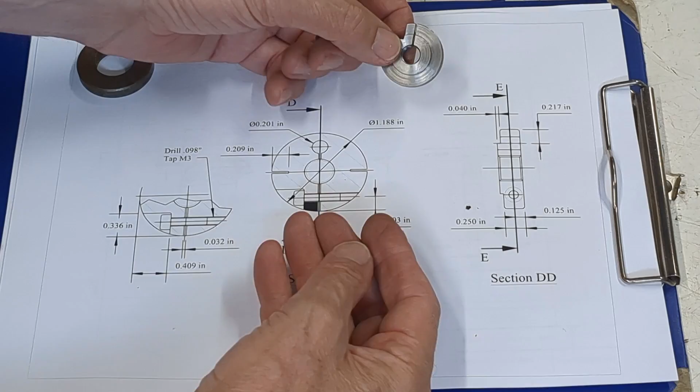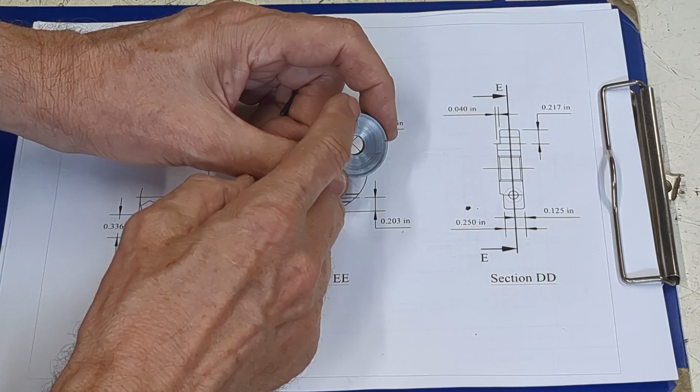I don't know what I was thinking when I drew up the split nut. There's a little tiny 3mm screw that goes in there, and the idea was to clamp that up and tighten on the thread. But there's no way that that is going to bend that section - that's just totally unrealistic. What I should have done is relief this side here and maybe put some additional cuts here as per this modified drawing.

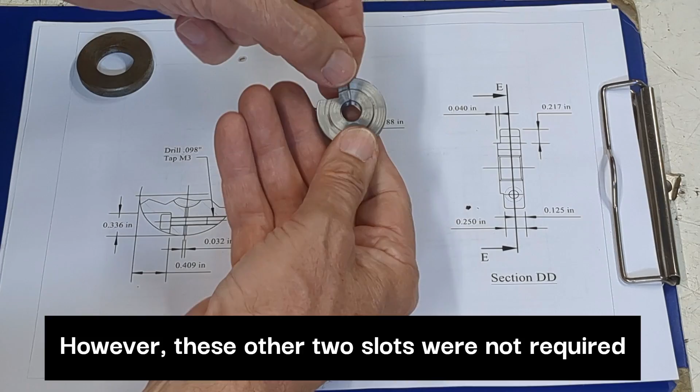So what we need to do is drill in position here this hole, and then continue the slitting saw through into that, and additionally a couple of slots from the outside, and those slots from the outside will just clear the shoulder, so they'll come into sort of that position.

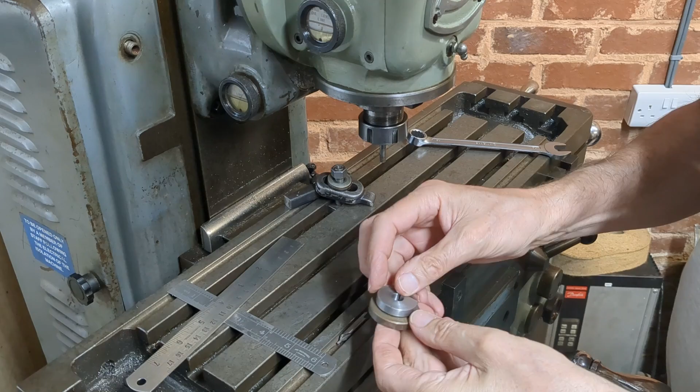So over to the mill to set this up, first of all aligning this with the axis of the machine, picking up on the diameter and drilling that hole. I need to sit the component on this little disc I've got here so I don't go into the table, and also I've got adequate support.

I used a ruler which fitted nicely in the existing slot to align the slot with the axis of the table.

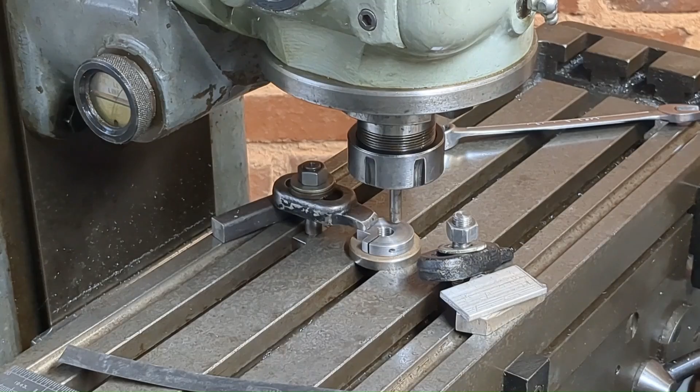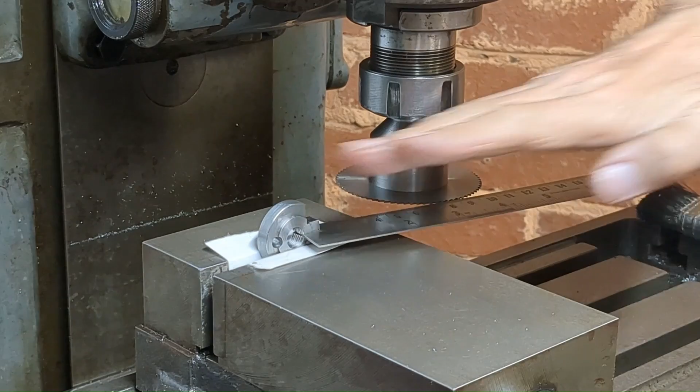Again, the ruler came in handy for lining up the slot with the slitting saw to extend that slot through to the other side.

Let's just see if that's cut all the way through. Oh, it has. Great.

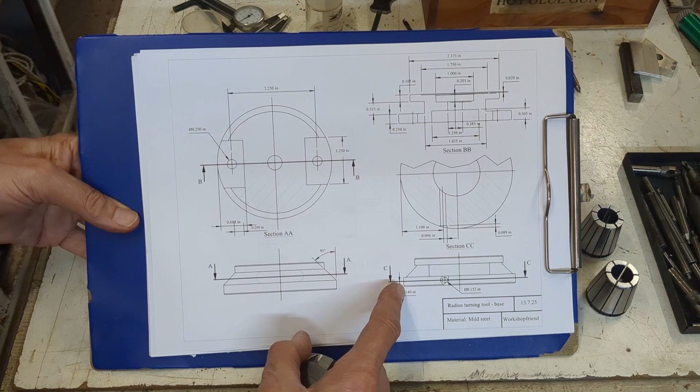So here's the modified drawing for the base. We need to add this hole, and I put the critical dimensions on there from the diameter to this center line and from the end to this center line.

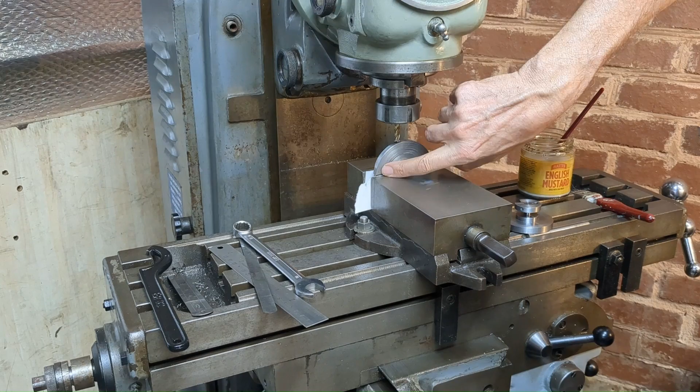We're going to first need to just mill a flat in there so we can drill right through, and it goes in that direction. Okay, I've touched off from this corner, and in fact I did measure not from the outer diameter but from that corner. That's what I've shown on the drawing, and just to double check that I am indeed cutting the slot on the right side - it's very easy to make mistakes like this. Here is the split nut, so that's correct.

Okay, quick transfer to my pillar drill, and I've picked up that center, so hopefully we can drill that through now.

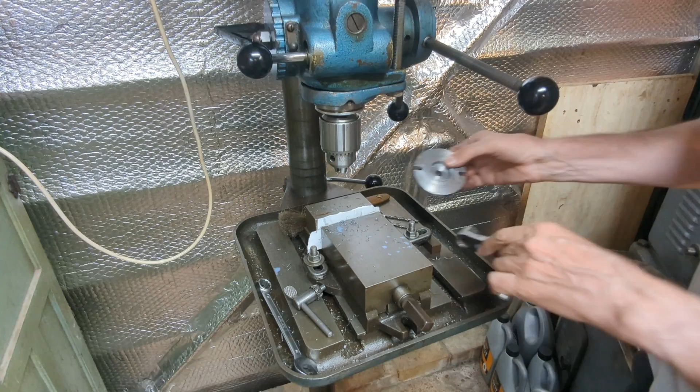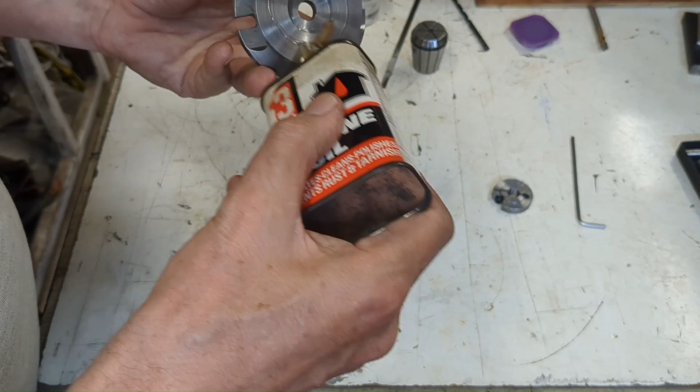Okay, time to see if this all fits together. Of course, I've given everything a thorough clean and deburr, especially that hole.

Now this is the crucial bit. Does that line up? Yes, it does. Good.

So now we can control the clearance and achieve, hopefully, a little turntable that doesn't have any slack in it. Seems like you need to nip it up slightly just to partially grip the thread and then finalize it.

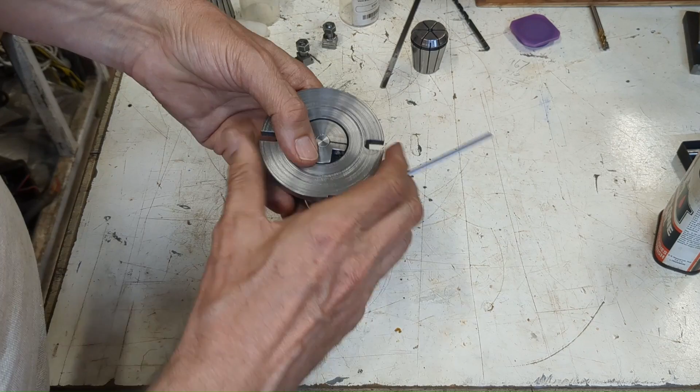That's a bit too tight. Yeah, that feels nice.

So the turntable is now completed and we can move on to the turret that sits on top of this.

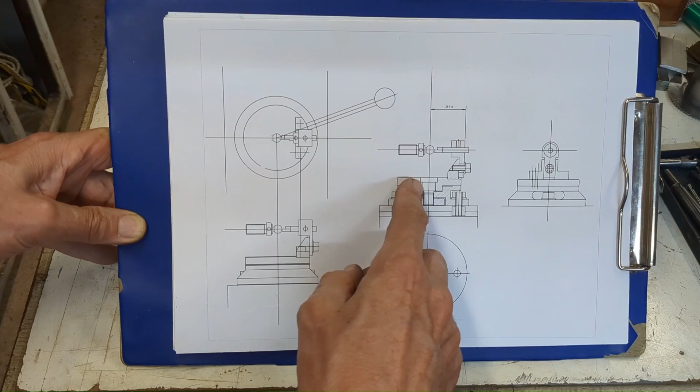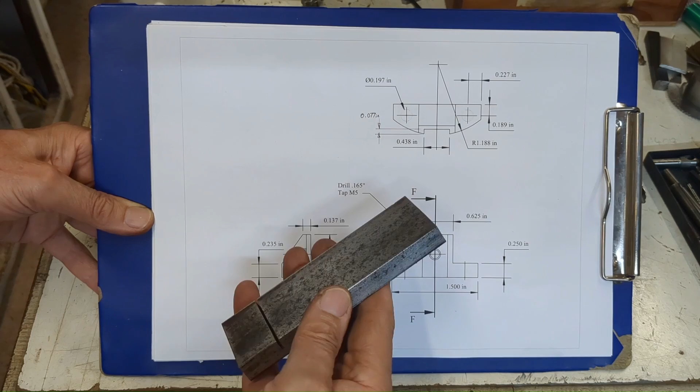The next item to work on is this bracket that sits on top of the table. So I have a detailed drawing here. It's just 1/2 inch thick by 1.5 long by 3/4 of an inch high, and the piece of stock I've got is here. I've just cleaned it up a bit, got rid of some of the rust, and I'm going to put that in the milling machine. And I think the first thing we're going to do is cut this profile and the slot.

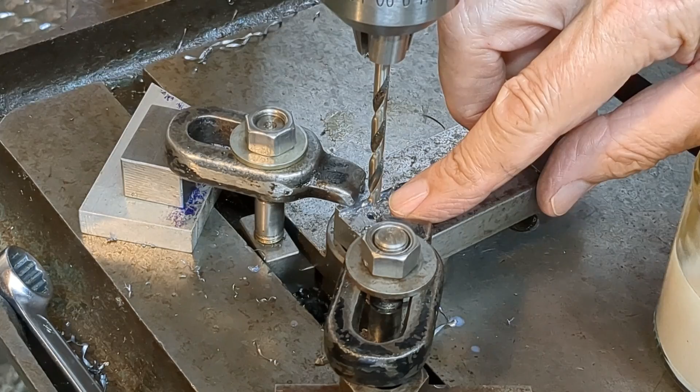Back to the drill to open out the center drilled hole for an M5 thread, and this is where the tool holder will bolt to the bracket.

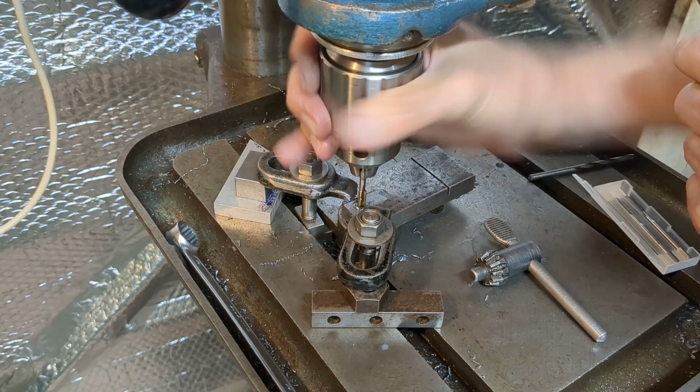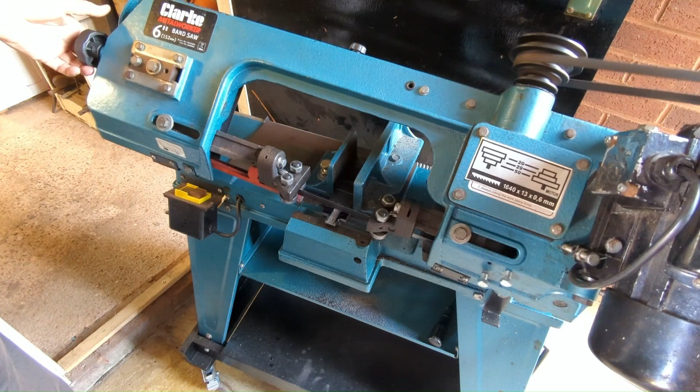At last I can chop off the bracket from the extra stock. The extra material is no longer required for work holding.

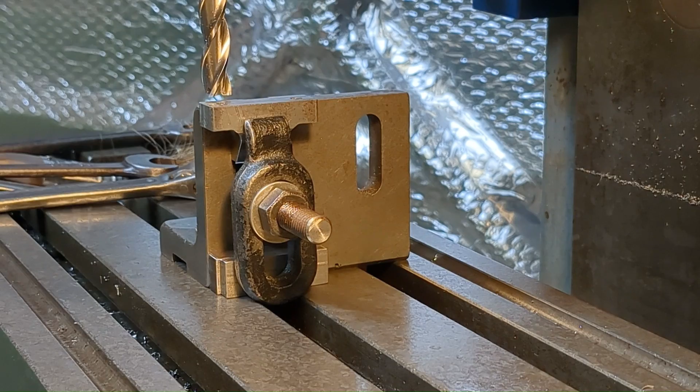I've set up the bracket on a small angle plate and I've dialed it in this way. It's only a short face, but I think that's sufficiently accurate to make sure I'm cutting this square. And I need to reduce this to 1/4 inch thickness, so I'll come down, touch on this edge here, and then I know how much I need to raise the table by.

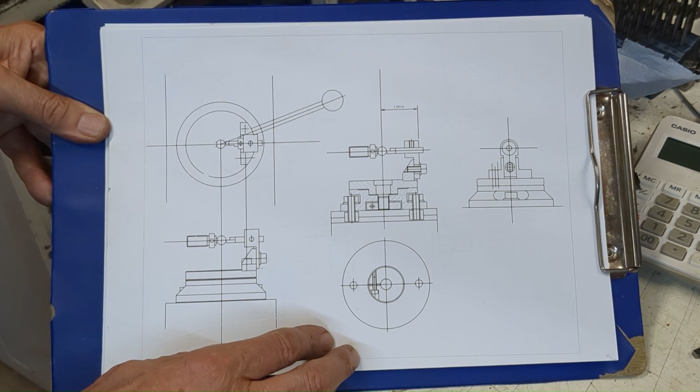Another change to the design - this is the location of the bracket on the table. In the original layout I was just relying on close-fitting countersunk screws. For me it's quite difficult to accurately locate holes, so I've come up with another idea: to recess the table so that the bracket actually sits in a sort of recessed area.

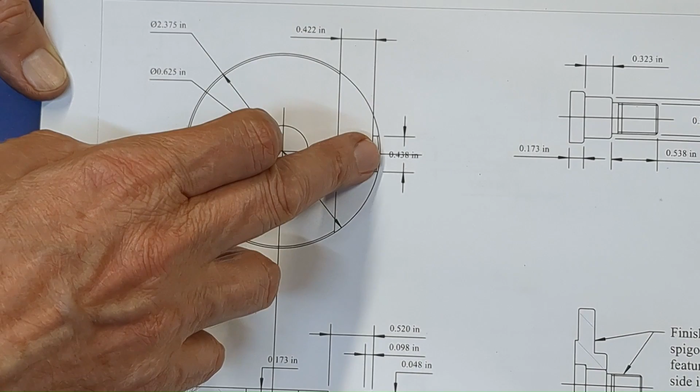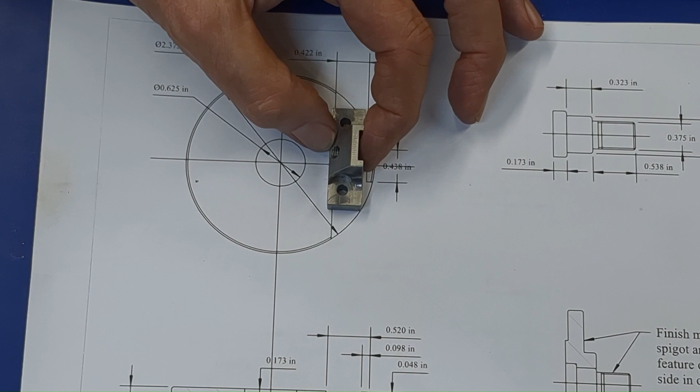This means the table needs to have a slot cut into it, basically a chord with a fairly precise distance from the edge of the body or the edge of the table - 0.52 inches - and it will leave a little land here. The idea of that land is that it will locate in the slot to the rear of the bracket like that, and that should then locate this in terms of its angular position and also across the radius like that.

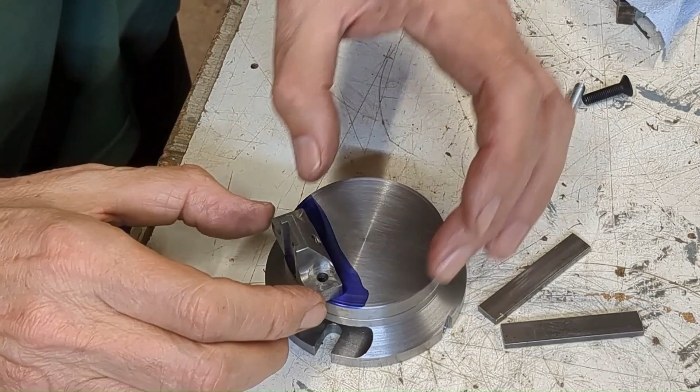So there's plenty of scope for error here. Rather than just taking it over to the milling machine and relying on my dials, I'm going to scribe a couple of lines on this just as a rough guide to make sure I'm cutting in the right position. I'm just using this to line up on the radius, and then I'll use that to scribe a line.

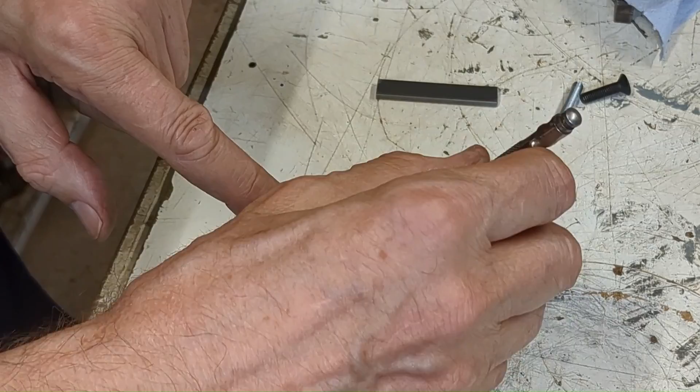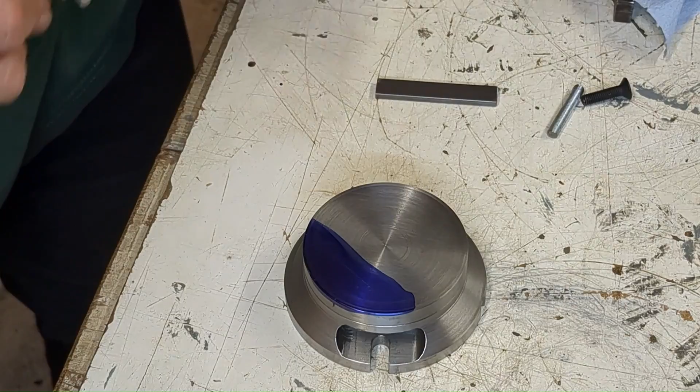I'll just do a quick visual check on that. That's 0.53, it should be 0.52 - I guess that reflects the thickness of the scriber point. And I'm going to do the same for the land that will locate in this slot. More difficult than it looks, actually.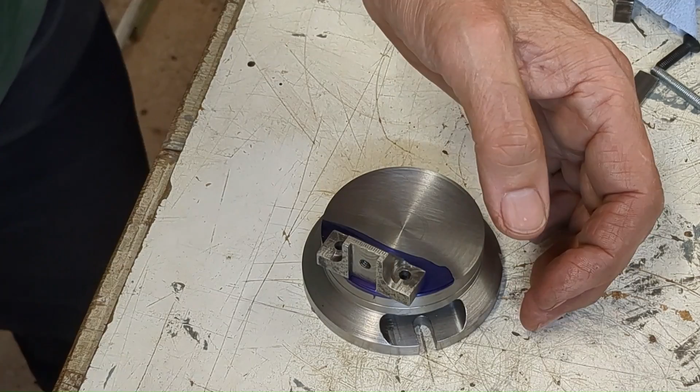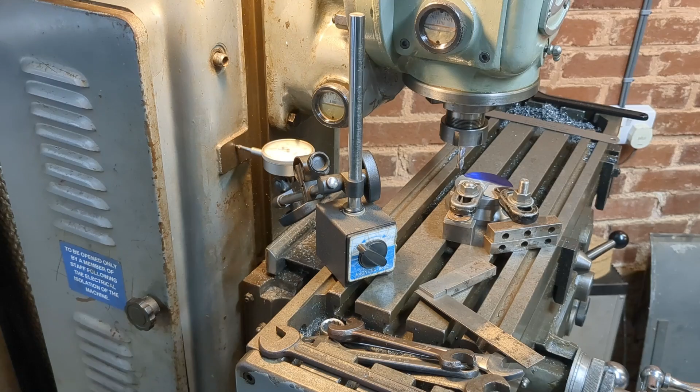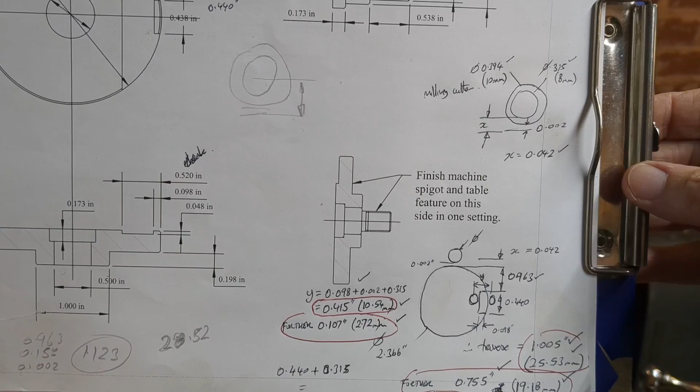So this is my setup for milling this slot. This is at the last stage really of working on this table, and a lot of work's gone into it, so I really don't want to make a mistake. I went inside and had a cup of tea and did a bit of arithmetic just to work out the table movements - I thought that would minimize the chance of error.

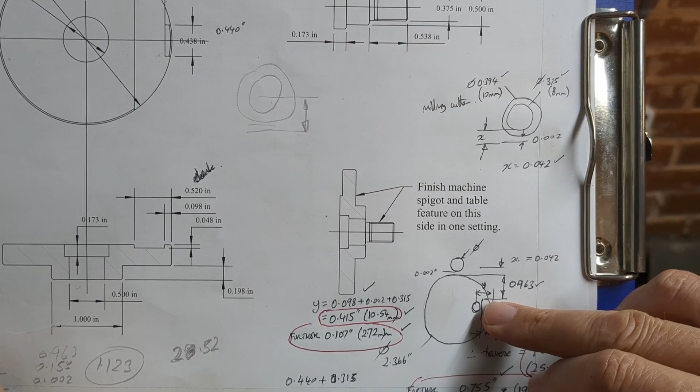What I'm going to do first is touch off on the rear diameter, and I have got to traverse across by this amount to cut this side of the land, then across again to cut the other side, and then I'll touch off on this side of the diameter, move across this way, cut this face, and then the other side of the slot.

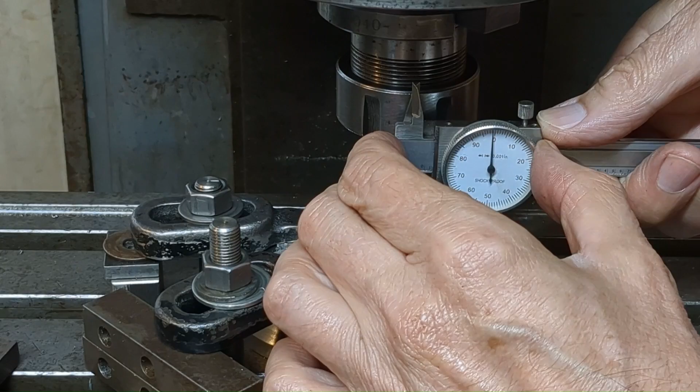Great, that's the fit I was looking for. Okay, over to the drill. This actually fits in quite nicely, but just to make sure, I put a clamp over the top of it, and it's very slightly up at the back so it puts most of the load on the front here - hopefully that will seat it nicely. And of course I've got a clamp here with a spacer underneath so I can drill through.

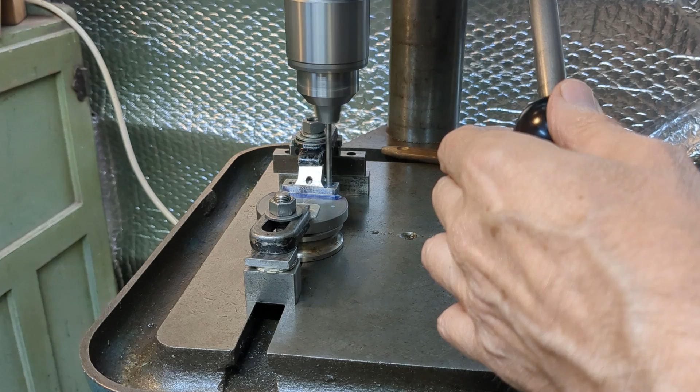At last, the final stage on the table, and this is just to tap it to M5.

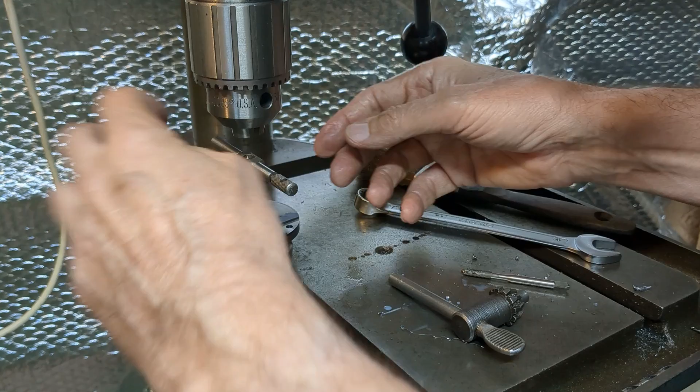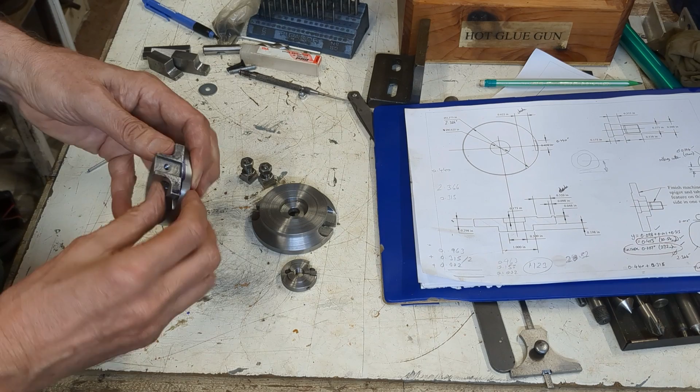So the base is complete, the table is complete, the split nuts, obviously the holding down bolts. This isn't quite complete yet - this needs to be fitted and mounted on the lathe to cut this outer radius. But I don't have the socket head cap screws for this yet, so that will have to wait till next video. I do hope you'll join me for that.